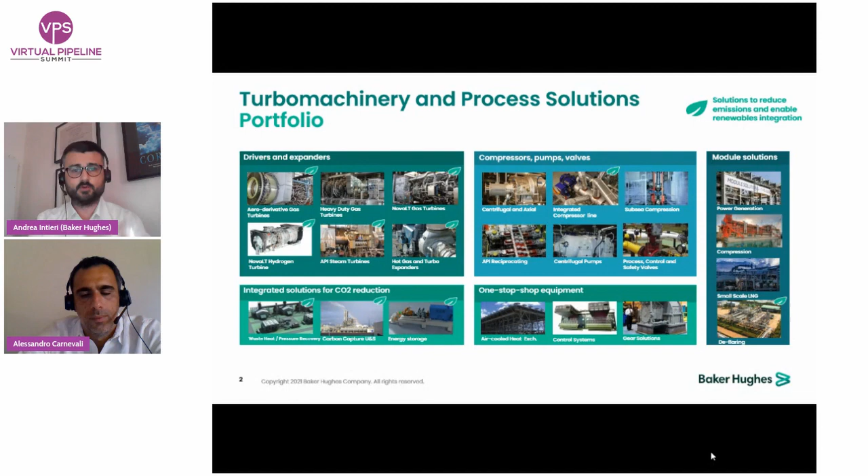One product I will talk about later in my pitch will be the integrated compressor line, or ICL, which is another innovation that allows, let's say, zero emission into the atmosphere. Baker Hughes has also an important portfolio of carbon capture, utilization and storage, and energy storage solutions. Last but not least, Baker Hughes has also capabilities for deflaring plants, basically bringing to the next level the needs for decarbonizing and transforming the core in the oil and gas industry.

In this chart, you can see an overview of the gas transmission system. The dotted black line is basically the high pressure network that is connecting the upstream production to the typical end user, residential, industrial, and power generation. There are multiple points among these two extremes, and multiple technologies that today can be implemented in order to decarbonize, on one side, the operation of the gas transmission - so the key role of the pipeline operator - and on the other side, to decarbonize typically hard to abate sectors such as heating and transportation.

Many of these technologies have been mentioned today already. They include clearly new fuels like any color of hydrogen, in particular the blue and the green, as well as biogas. Gas and power sector coupling also has very high potential, according to our opinion, because it allows us to leverage the molecules and the long-distance low-cost transmission of energy when compared with the high-voltage grid. Fugitive emissions clearly play a role in this mix, and we'll talk about this later in the pitch. Last but not least, clearly replacing old-fashioned gas turbines with new high-efficiency models, as well as implementing waste heat and pressure recovery systems, can really allow a full decarbonization of the pipeline system.

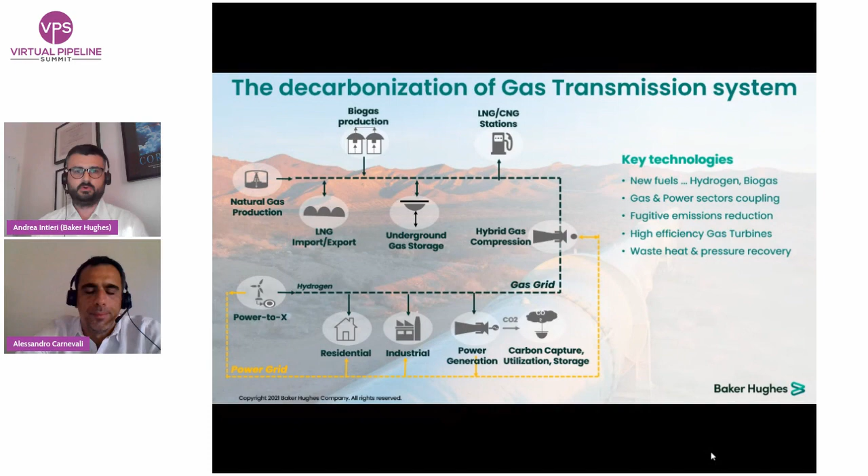So let's start with hydrogen. It is important to touch on the wide experience that the industry, in particular Baker Hughes, has gained over the years. We have a fleet of roughly 70 units that has been running with high H2 percentages up to actually 100%. This portfolio of products includes different technologies like the typical heavy duty, the aeroderivative gas turbine, as well as the light industrial, in particular the NovaLT family.

Two are the cornerstones behind this experience. One is a full-scale demonstration plant that has been developed in Italy years ago with a GE10. This is a demonstrative project with an Italian utility that has been very successful and allowed us to gain experience in burning hydrogen. On the other side, the NovaLT technology has also been tested with dedicated combustion tests up to 100% hydrogen and demonstrated the capability to start up with 100% hydrogen.

The same project has also been developed together with an important pipeline operator, the biggest in Europe, Snam, which has been testing a 10% hydrogen blend with the NovaLT12 technology, which will be installed in the Italian gas grid in northern Italy later this year.

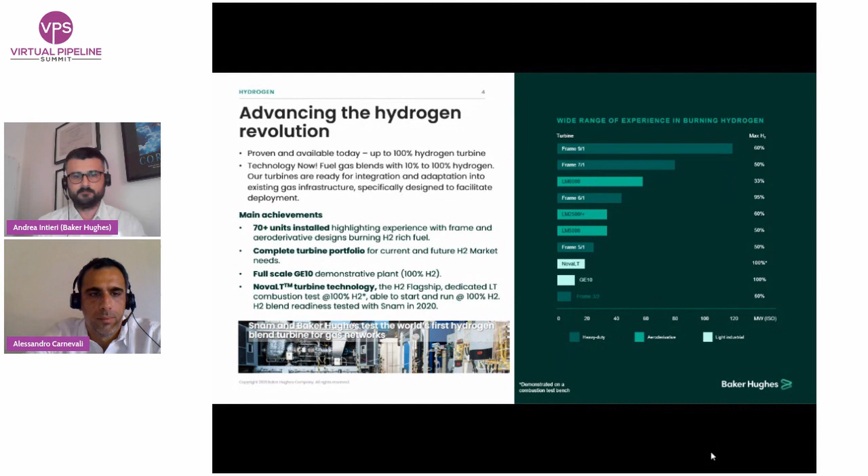The compression of hydrogen is a market that is largely used in the oil and gas industry, in particular for downstream plants.

We are used to serve this market basically from the beginning with our centrifugal and reciprocating compressors. Here I collect basically the list of our milestones related to the compression of hydrogen. Our experience with the first reciprocating compressor started in 1922 with the first ammonia syngas train, where the hydrogen content was higher than 75%. Then we installed the first reciprocating and centrifugal compressor 60 years ago, which was handling basically 100% of hydrogen.

And then we continued during the years up to a few months ago when we sold the last reciprocating compressor that will be installed in a green hydrogen plant. It basically will take the hydrogen from electrolyzer fed by renewables, and it will push the gas to the grid for transportation. So during this year, we got a lot of new plants.

We installed something like 2,400 units working with hydrogen, with more than 75% of hydrogen, and something like 960 units working with basically pure hydrogen. On top of this, we have also some strategic agreements with some main players. The last one announced is with Air Products for the construction of a large-scale new plant for hydrogen production.

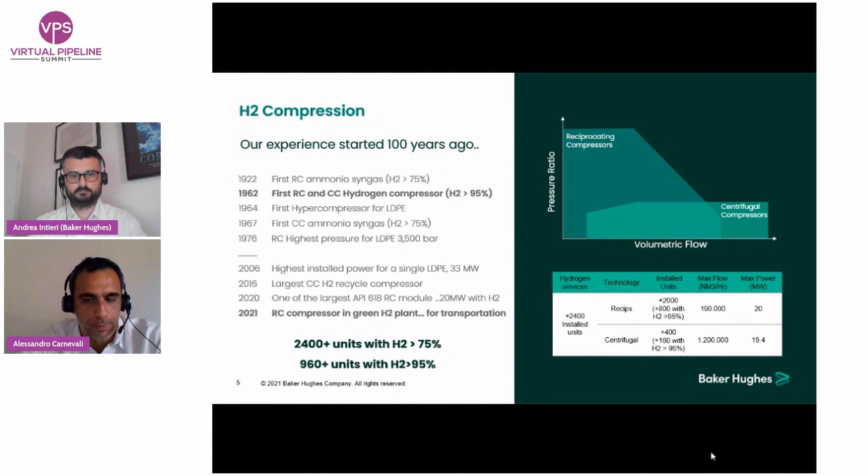If we go to this slide here, I try to summarize some takeaways to understand what are the impacts that blending hydrogen on existing equipment designed for natural gas may have. The hydrogen presence basically affects the materials and the thermodynamic performances of the centrifugal compressors. Material, because of the so-called hydrogen embrittlement phenomenon, which is a matter of partial pressure, basically.

So if we try to draw a sort of line to understand what may happen in a typical pipeline at 70 bar, we can see that considering the compressor designed for natural gas up to 5% of hydrogen, we do not expect any issue on the material. At 5%, we need to check something around the flange-to-flange compressor, so mainly auxiliaries. And at 10%, we need to check the material of the rotor of the compressor.

From a thermodynamic standpoint, basically adding hydrogen means reducing the weight of the gas. So we need to make the same pressure ratio with higher power, and to run faster. Of course, in case we want to transport the same energy as before, we need to increase also the flow, and it will increase much more the speed and the power. By the way, due to the complexity of the case, this is something that we can do only with a detailed study to see case by case what happens.

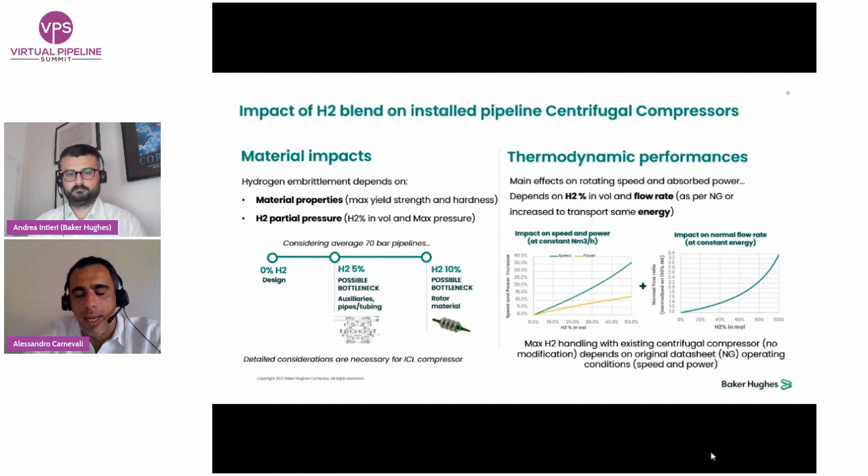And thanks to its new design, we are able to run faster compared to the standard compressor. The main differences with the standard compressor are basically two. One is that the stages are connected by Hirth, tightened by tie rod, and the impellers are not shrink fitted on the shaft, so there is not the risk of loss of interference due to the high speed. The other is the introduction of open impellers, which reduce the stress on the impellers.

In this way, basically, we can increase the speed by roughly 50% compared to a standard compressor. And since the head is proportional to the square of the speed, it means that we can do the same service with half the number of impellers, so half the number of compressor bodies.

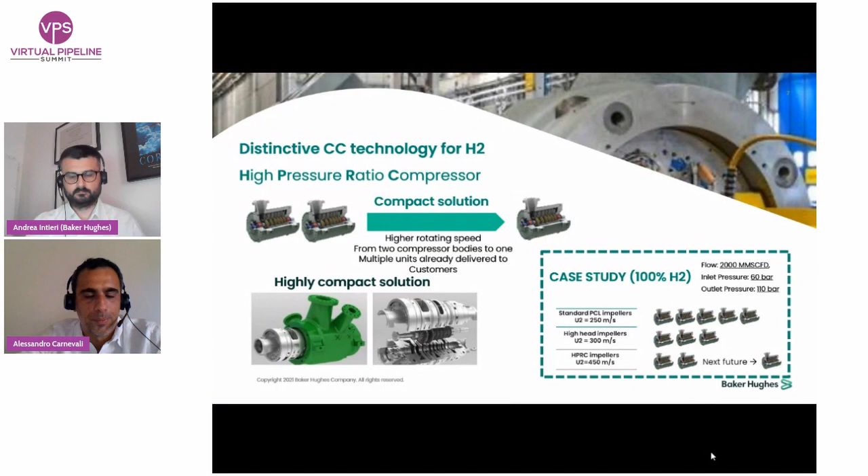Thank you very much, Alessandro. Of course, decarbonization does not mean only hydrogen. Another very important trend, specifically in Europe but also in other regions of the world, is the trend towards electrification.

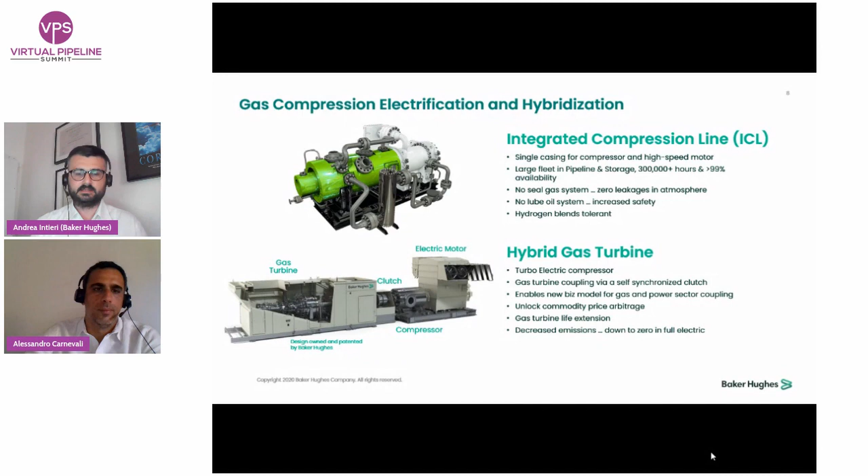To complete my presentation, I would like to briefly introduce methane leakage reduction. The previous presentation already touched on how important it is to reduce fugitive emissions, and in particular, compression stations are one of the biggest sources of fugitive emissions.

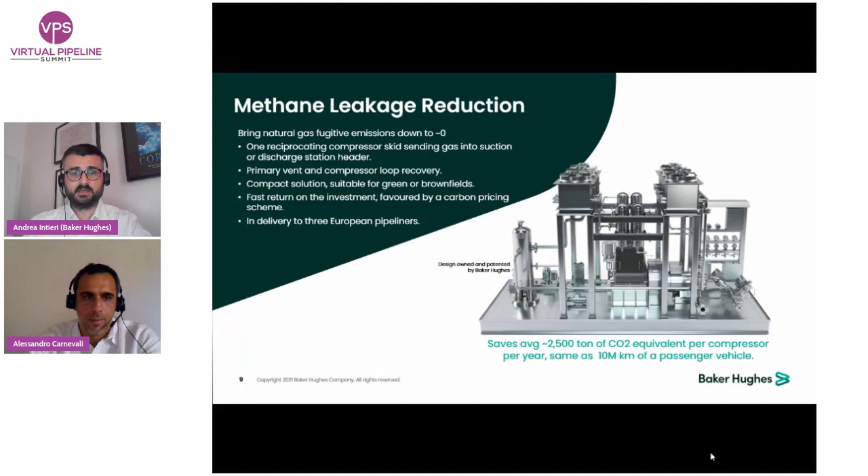With this, I would like to thank you once again, and of course we are available for any questions you might have. Thank you.